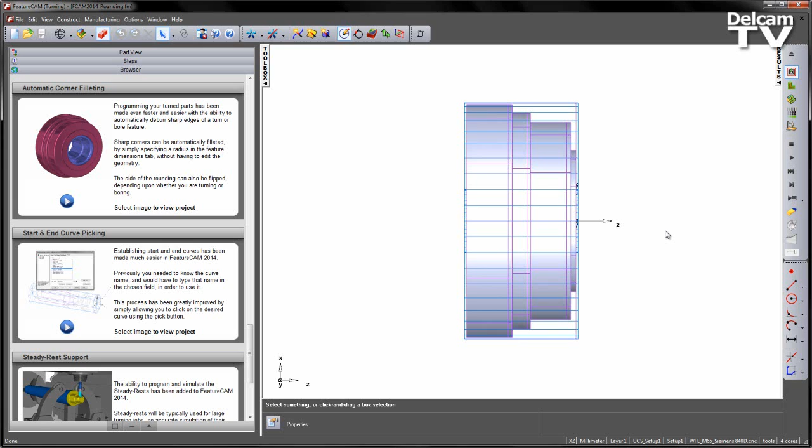Programming your turned parts has been made even easier and faster in FeatureCAM 2014 with the ability to automatically deburr either internal or external sharp edges of turn or bore features.

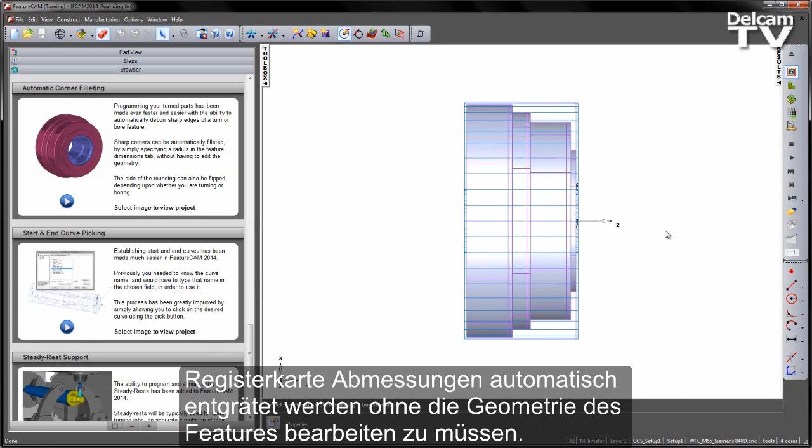Sharp corners can be automatically filleted by simply selecting a specified radius in the Dimensions tab without having to edit the geometry of the feature itself. The side of the rounding can also be flipped depending on whether you are turning or boring. In this example we're going to look at both situations.

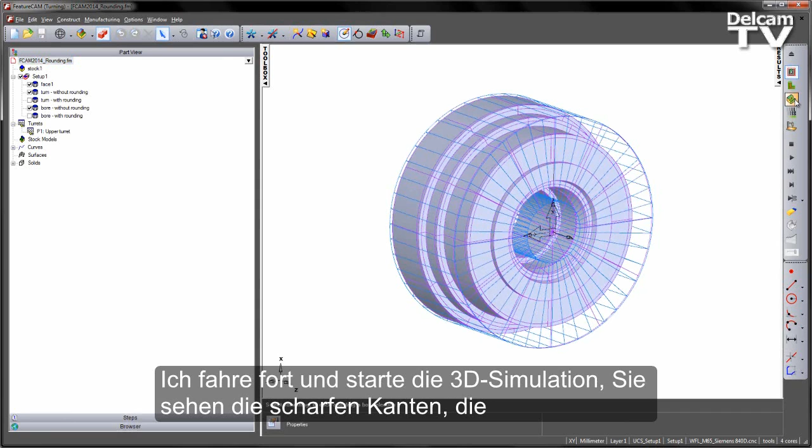Here I have my part, and I've got a number of pre-created features already, and in this case you can see I've got a face, a turn and a bore. If I go ahead and just play the 3D simulation, we can see the sharp edges that we're left with on the model.

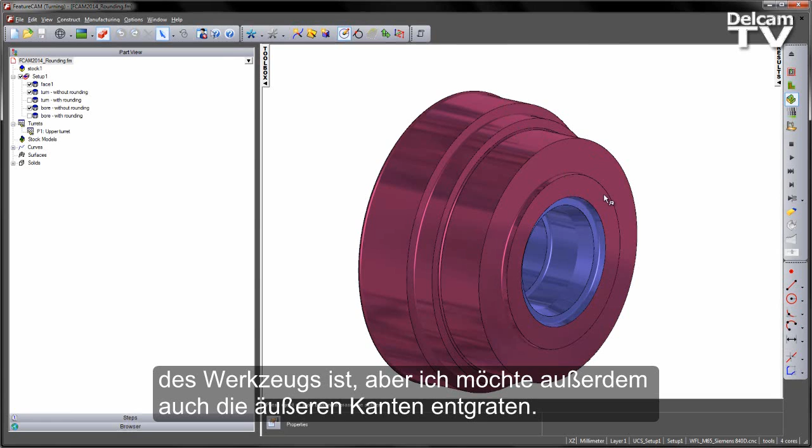The internal corners already have a rounding purely because that's the shape of the insert of the tool, but I also want to deburr these outer edges as well. To do this, you simply go into the turn feature, and on the Dimensions tab you can see we have a fillet radius option. We can also indicate which side we wish to cut.

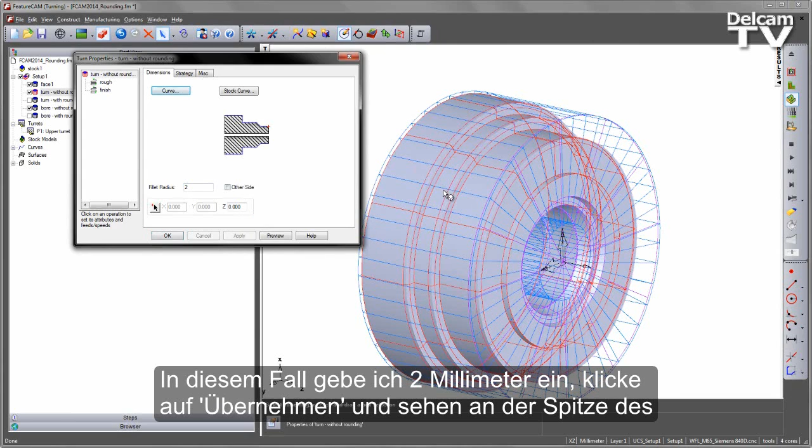I'm going to stop the simulation and enter a value. In this case I'm going to enter something like 2 mm, apply, and if we look at the top of the part you can see the amount of fillet radius that we've added to the component.

We can continue to increase that value and apply, and you'll see the radius get bigger, or if we just want to deburr the edges we can go something smaller. Note that I'm not changing the geometry, this is just simply affecting the dimensions of the feature itself.

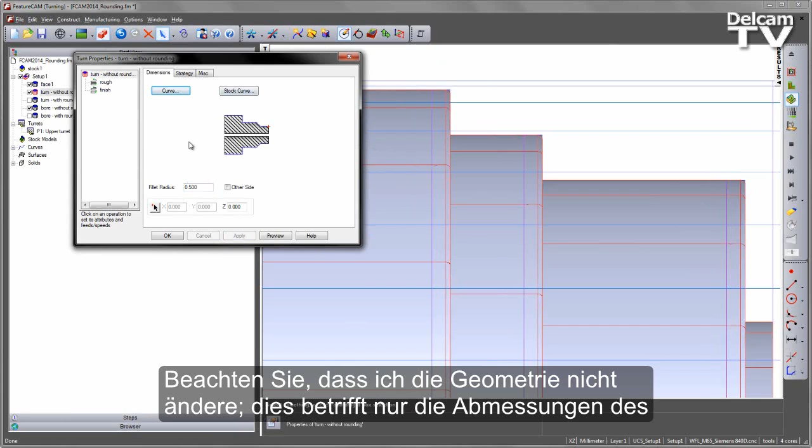If I wish to apply this to the internal corners instead of the outside corners, I simply flip the other side option and that moves it to the internal corners instead. I can repeat this for the bore operation as well.

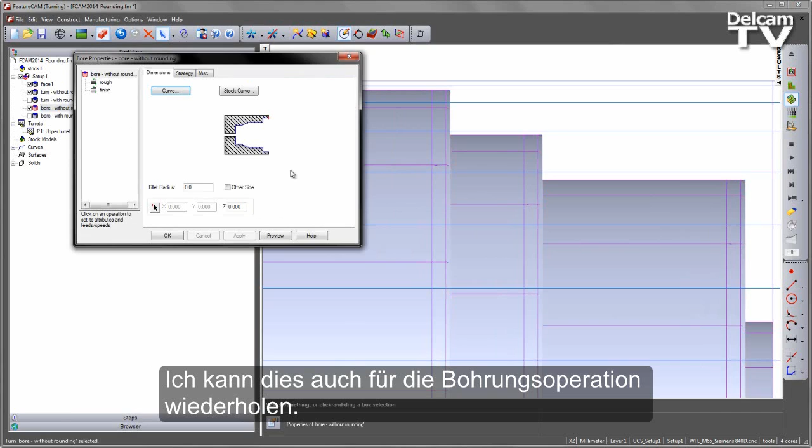So in this case you can see the shape of my curve again. And again I can apply a fillet radius, say 2, and using the other side we can work with the bore and take those sharp edges on the internal areas of the bore itself.

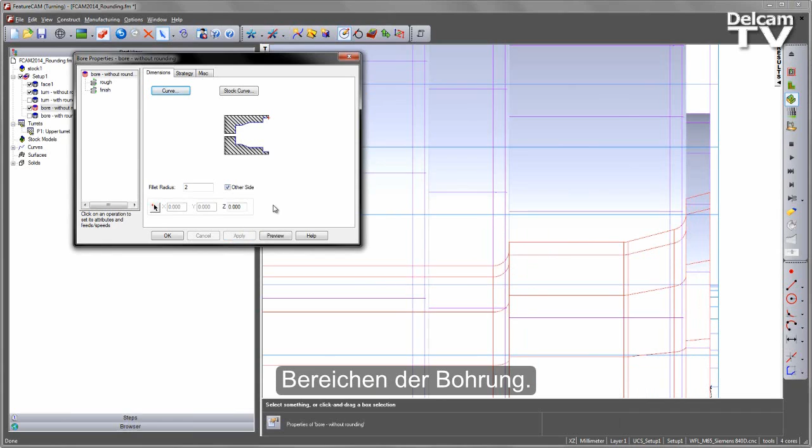Once I'm done, choose OK, replay my simulation, and you'll see we get the filleted edges across the top and also inside our model as well.